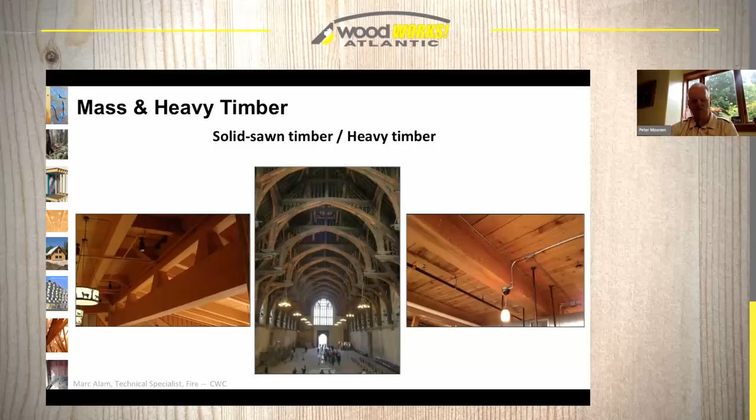So sometimes we think, gee, building tall with wood is a new thing - it's not so much a new thing, it's that we've forgotten that we did know how to do it. We're just getting back to that. It's a bit of a renaissance for wood.

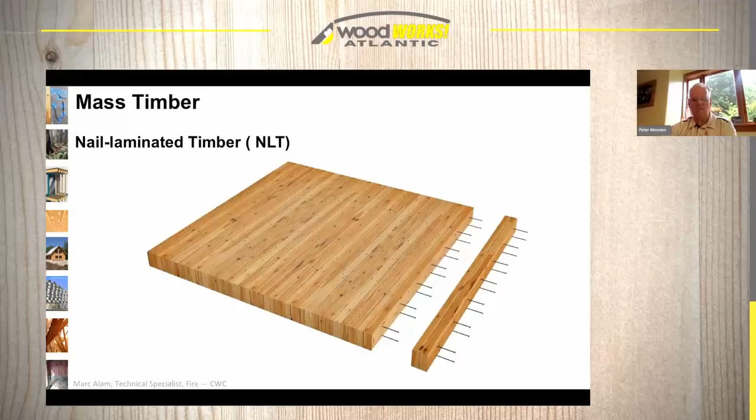The product I mentioned, nail-laminated timber, is mechanically fastened. It's long been used since we developed nails to make larger slabs of wood - fairly simple process, can be done on site, but increasingly is done in panels that are then shipped to site. Glue-laminated timber has been around for 80 to 90 years, and essentially uses smaller pieces of lumber that can come from smaller trees and are laminated together with a structural resin that can displace heavy timber and makes better use of the forest resource, either because it can use smaller trees or because it uses less wood overall compared to solid wood.

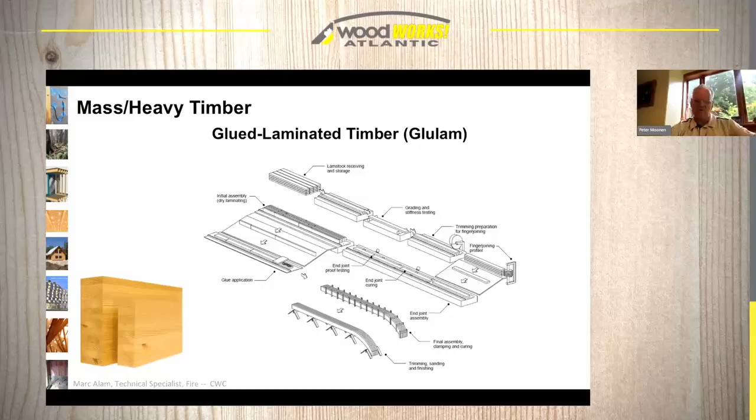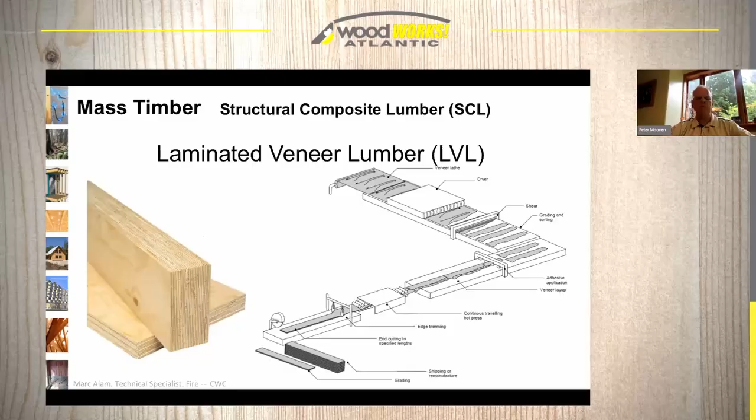Laminated veneer lumber uses veneer very similar to that used in plywood, but the veneer is all oriented in a single direction. So LVL, you've probably used it in headers along with LSL and some other engineered wood products if you're using light frame construction. But it is also a mass timber product - it can be glued together, and some companies will make it thicker.

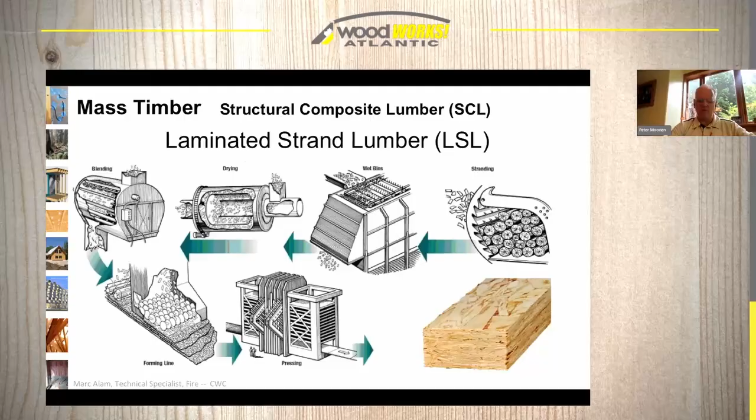Laminated strand lumber, oriented strand lumber - these are also composites made of smaller pieces of wood and resin, formed by pressure or extrusion, either by plates or by continuous process. They create a product like all mass timber products that's consistent in performance and cost, so the first lineal foot of a product like LSL is the same price as the last lineal foot.

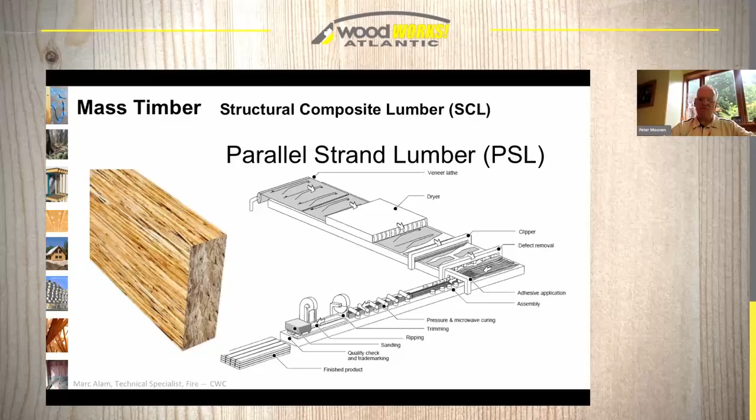Parallel strand lumber is probably the strongest engineered wood product. It uses long strips coated with PRF resin, put under pressure, extruded through high temperature, and produced in 64-foot lengths, which can then be resawn. They can be glued together. They're excellent as columns or posts. It's more expensive, but about 3 to 6 times the strength of a conventional solid wood product.

So these are all mass timber. CLT is sort of the poster child for mass timber. It uses traditional dimension lumber and is glued in cross laminations. It's been around for about 35 years in Europe, and about 13 years in Canada. It has the opportunity to displace other solid panel products, whether precast or tilt-up concrete panels, because it has a lower embodied impact, and we'll get into that.

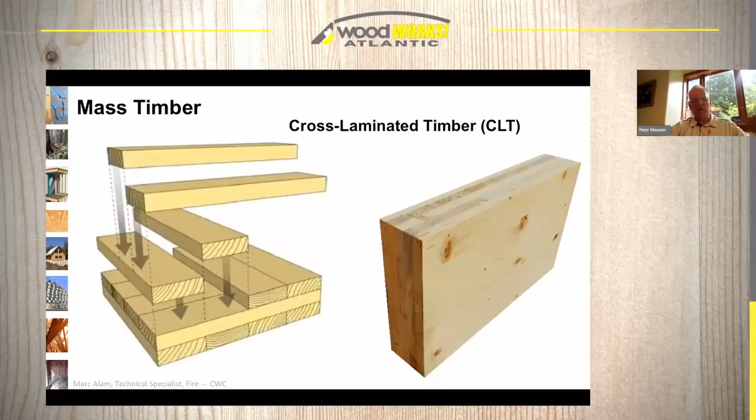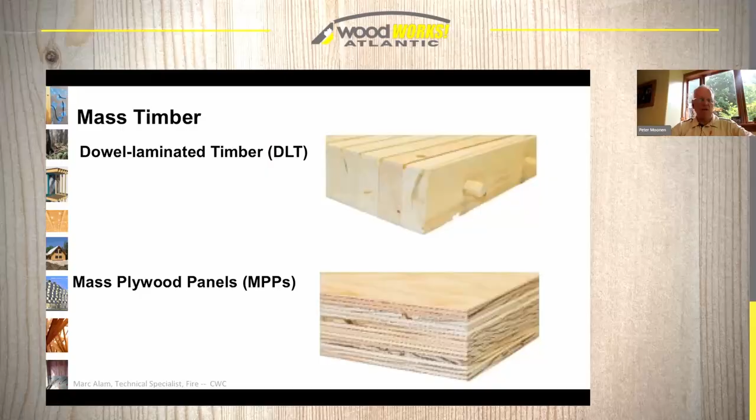Others that are out there now: dowel laminated timber, very similar to mechanical fastening with nails, but it enables a CNC to cut an opening for a door or window without encountering nails. And then mass plywood panels, MPPs, are only produced in one plant in the United States, but it's an exceptionally strong and versatile mass timber product.

There are mass timber products or plants all around Canada. We're constantly shifting, changing, and growing. Companies are either establishing themselves as new companies or expanding their facilities to meet growing demand. None in the Maritimes at this point, but I think we'd like to see that change, and I know there are some efforts going forward to make that happen.

One of the things that is increasing is full integration. It's possible to fully integrate our value process for wood products, and I think the industry is looking at mass timber, wood fiber insulation, and the future uses of these products. So we look at mid-rise construction or tall wood - that's going to require a different product than a high-performance single-family home.

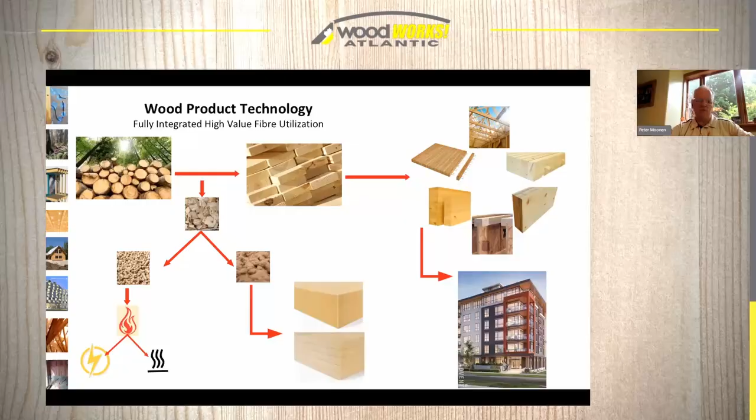The products that can come from a log include solid and also fibrous components. The fibrous components that can't be used in a structural or long-lived product can be used as an energy source to displace fossil fuels, and that is increasing, as well as looking at wood chips or wood products that maybe we don't want to put into paper or newsprint, which is relatively short-lived. We can make them into products like OSB, LSL, or wood fiber insulation, which is quite common in Europe, and all the facilities are increasing their production.

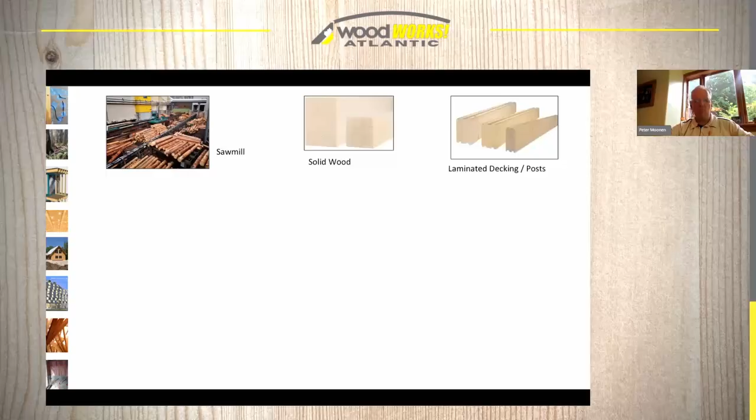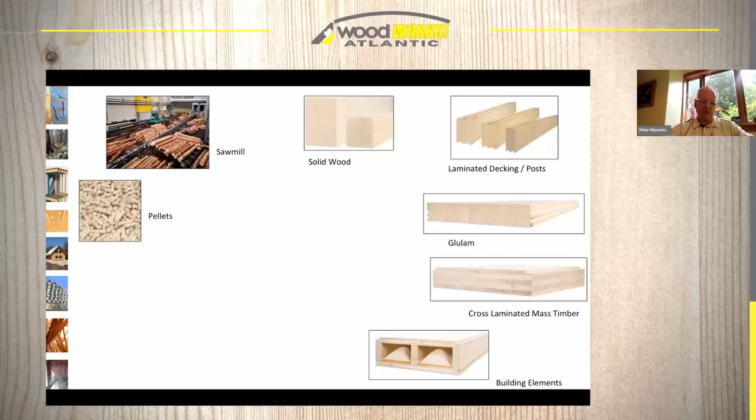So I want to talk briefly about one facility. It starts as a sawmill. It makes solid wood, laminated decking and posts, glulam, cross-laminated timber boxes, or torsion box products out of wood. It also makes pellets and energy - electricity, steam, heat, hot water, refined fiber, and wood fiber insulation.

And it's all in this one plant in a small town in Germany - you can see the town in the background. That plant was a sawmill for 100 years, and then they started growing and diversifying, and now they make all these products in that one facility. This blue-roofed building was the original farmhouse from 100 years ago that they've modified. So the potential for really utilizing our forest resource is amazing.

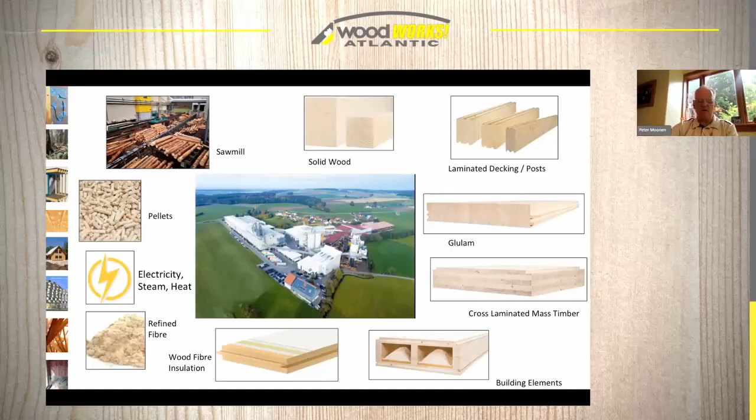Some of the opportunities I'll take you through are the regulations that are changing. We'll look a bit about construction capacity, changes in technology advancing both in design and wood, and some of the social issues we face, whether it's affordable housing or wanting buildings to be good for us. We'll take a look at some of the things wood can contribute to, like designing for deconstruction in the circular economy.

So first, let's talk about carbon. To deal with wood, you have to start in the forest. We've often said the benefits of wood are that they sink carbon in the forest, sequester it in buildings, and it can be substituted for other materials - that's the 3S concept. But it really starts with sustainable forestry, and sustainable forestry in Canada is something we have done very well. It's not perfect.

Anything that's done by humans, we're going to screw up. But for the most part, the certification levels that we have in Canada are as great as the next 10 countries combined. This was a certification globally around at the end of the year. Many of the areas in Canada are double certified - those have been removed from this - but we can be justifiably proud that we have a very high level of forest management, even if it's not perfect, and it will never be perfect, but we constantly improve.

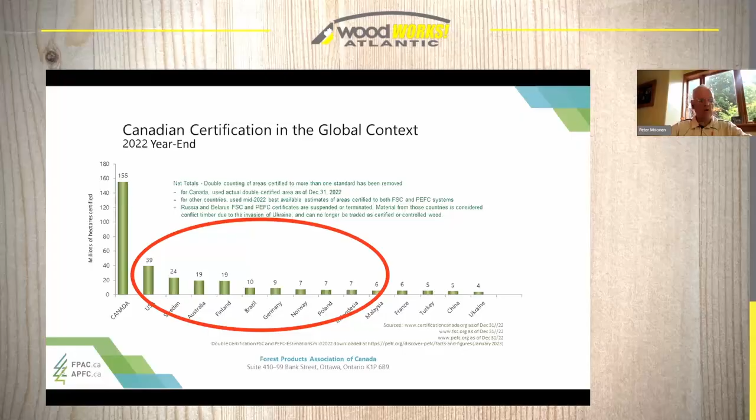The other thing about forests that we have to look at, especially these days - I know in the Maritimes there's been forest fires, I live in British Columbia, we have forest fires here. That is a release of carbon, and it comes from, it's basically an artifact of climate change, but we have to look at the forest carbon in the context of what the forest does for us.

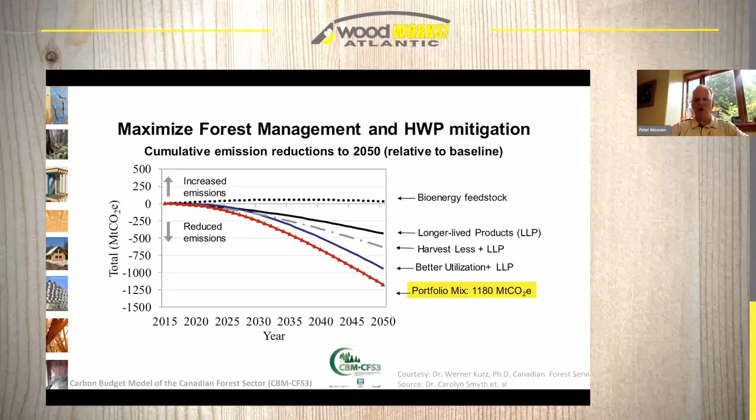The forest stores carbon, it produces wildlife or has habitat for wildlife, stores water, and produces wood products. You may encounter that there's several sort of 'let's just stop logging' or 'let's convert all the forests into buildings.' The carbon budget model developed by the National Research Council and Natural Resources Canada has been looking at the way to optimize carbon uptake and carbon benefits. They looked at bioenergy, harvested wood products and long-lived wood products, harvest reduction and conservation, optimization of the forest resource. And they found that if we're looking at carbon, we need to do a little bit of everything and do it really well. There's not a single solution - turn it into buildings or leave it all standing. None of those will optimize the carbon benefits that our forests offer.

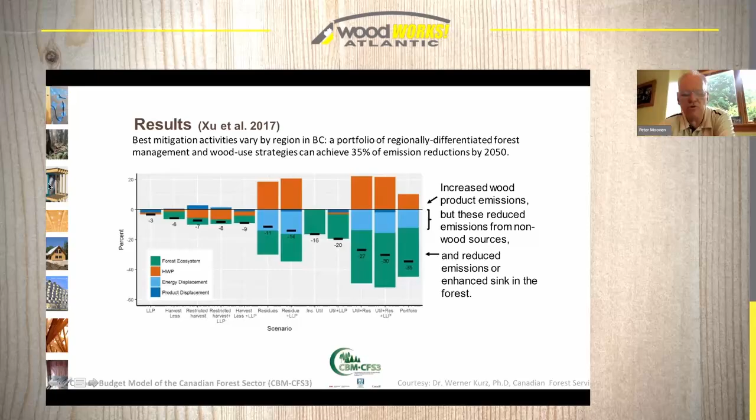The carbon budget model is available online, you can go take a look at it. As you can see, it's a parametric tool that looks at all the different elements that go into determining the carbon benefit of wood, from energy displacement to conservation.

There's also operational impacts, and that's basically high performance in green building. The federal government has indicated that they are going to be adopting a pan-Canadian framework that leads to zero energy, and will have a requirement in the 2025 building code to look at the carbon emissions associated with energy. In 2030, the building code cycle will bring in the carbon emissions associated with the embodied energy into wood products and other construction products.

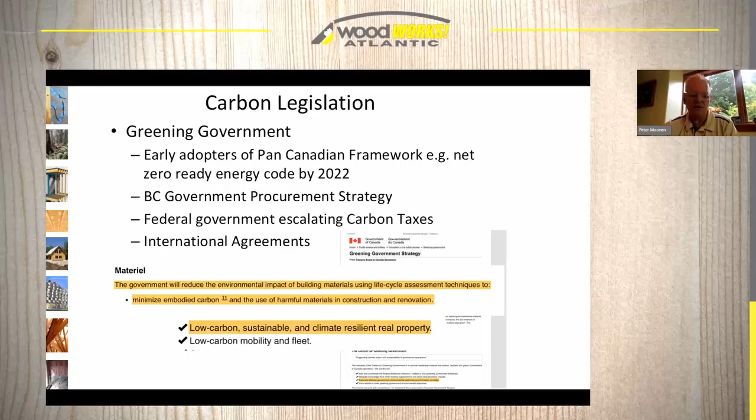So the government is moving quickly to recognize the carbon impacts of construction and their own procurement, and we're seeing that in local governments and provincial governments as well. It's not just reducing the energy use, it's reducing the environmental impact of building materials, and they'll be using life cycle analysis. Normally I'd ask people, who in the room has done an LCA.

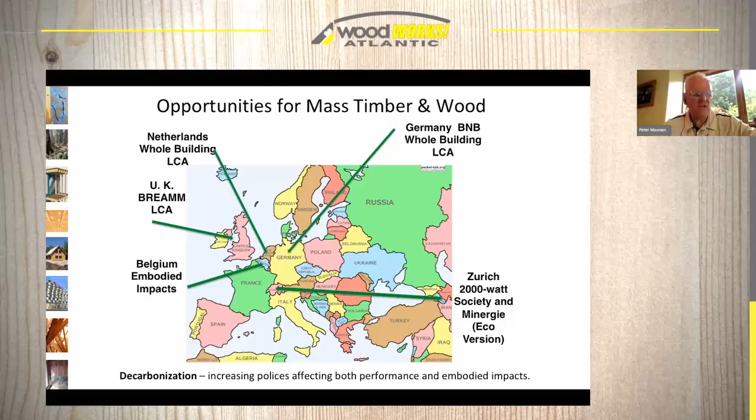I can't really see that, but it's not just in Canada that we're trying to advance the life cycle impact assessment. We're seeing it in Europe. In Switzerland, they were the first to have a plebiscite to look at a maximum energy use for people. Germany has whole building LCA requirements. Belgium went from having one of the lowest performance indicators to having one of the highest by requiring passive house construction. So the decarbonization effort is not just happening in Canada, it's happening around the world and often led by Europe.

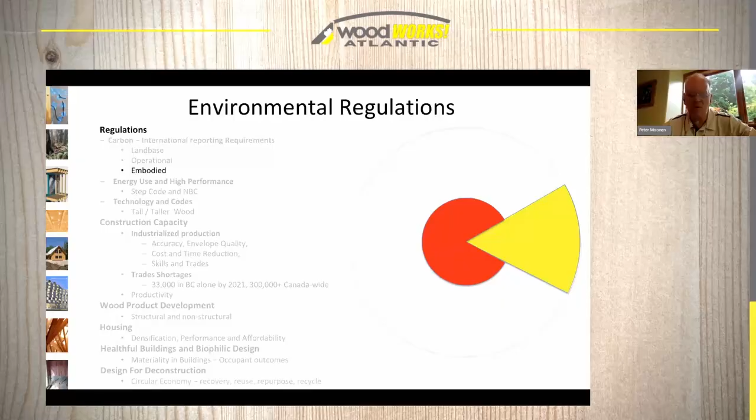I talked about embodied impact. That impact is essentially what goes into making these products. So we'll talk a little bit about that. Earlier, I mentioned the different aspects of wood and how it can have a carbon benefit or a carbon emission.

If one focuses on just the forest cycle, there are three areas. This was research done at the University of Washington, and it looked at the growth of a forest. This was a model based on the annual life cycle or potential life cycle of a tree. As a forest grows, it increases its carbon, and then when it's harvested, it loses that carbon from the forest, and some of it remains in the forest in soil, some of it decays over time, and some of it is in solid wood.

But over time, a forest will reach a stasis. We're finding this in the boreal forest, we're finding this in some forests in British Columbia. They store a lot of carbon, but they're not storing any more. They've reached a point where they are stable, but they're not increasing their carbon.

So the forest will eventually reach a stasis. If there is harvesting of a portion of that forest, then you can have both the carbon sink, but you can also have sequestered carbon. That's the carbon stored in products, whether it's furniture, books, or buildings. These buildings will last various lengths of time, so the slope of carbon uptake is less than that for the forest. But a real important consideration is that if you don't use other materials, you're avoiding the emissions associated with those.

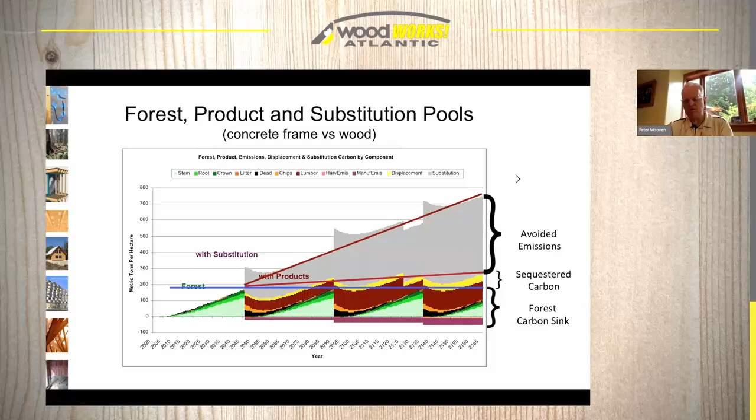So life cycle analysis is increasingly important. It's increasingly common. It's not easy to use. Some of the LCA tools are complex. There are several different tools out there, each with different assumptions and different ways they treat a material at the end of life, or in utilization, or in life cycle, or in lifespan.

So you think about that. We regulate the performance of a building, the building envelope, its structural integrity, seismic and fire resistance, and all that. But the parts of the building associated with carbon that are regulated account for just a quarter of the total carbon. We don't regulate how long a shower people have, or how much they cook, or what kind of equipment they use.

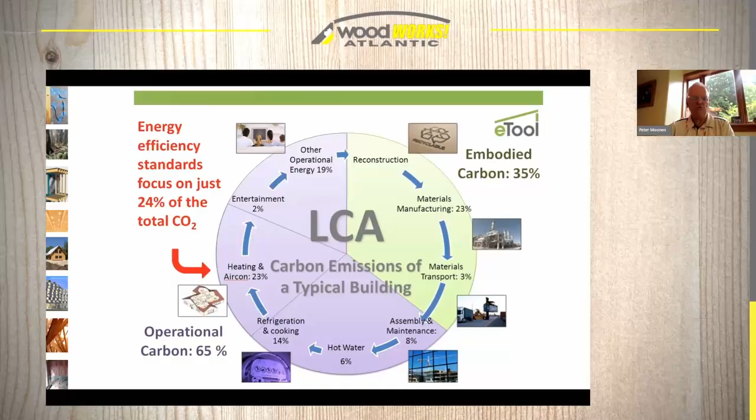But this points out that embodied carbon is an important component for us to look at. And we can't just focus on the energy performance. We have to look at the whole life of the building.

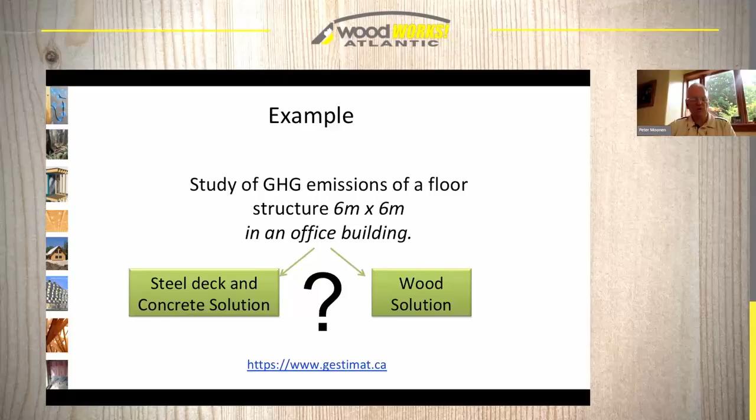There's a tool that was developed for the Quebec government a few years ago. It's called Gestimat. In Ontario, it's GHGMAT. It looks at actual building systems used in Quebec and now Ontario, determining what are the typical construction systems. They took those systems and determined what the environmental impact is of all of the components.

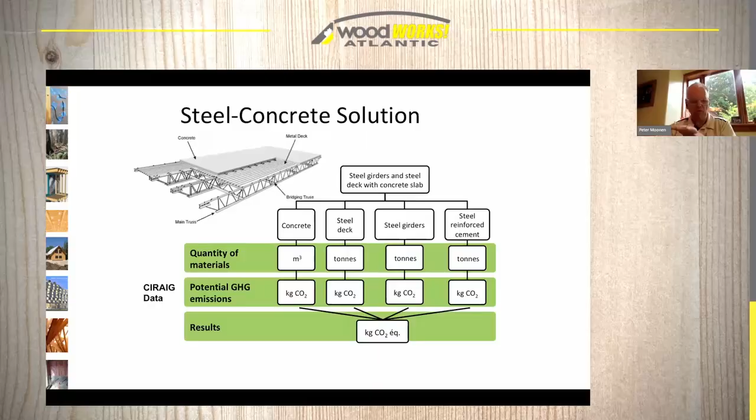So for a steel concrete solution, you're going to have an open web steel truss, for example. This is one of many systems. You'll have decking, rebar, and concrete. Each of those has a quantity or a mass, and that collectively produces the environmental impact. If we look at wood, it also has environmental impact. You've got to have the wood, the nails, truss plates, OSB or plywood. So all of these different systems have an environmental impact.

The use of LCA and tools like Gestimat or GHGMAT or other LCA tools help guide us into the approaches we may take. As mass timber comes into play, it's able to be incorporated in more building systems, whether it's a floor plate, a wall system, a structural interior wall, or a glulam beam or a column. So it's going to be important for us to understand not just the impact of a specific material, but the impact of that material in use with other materials.

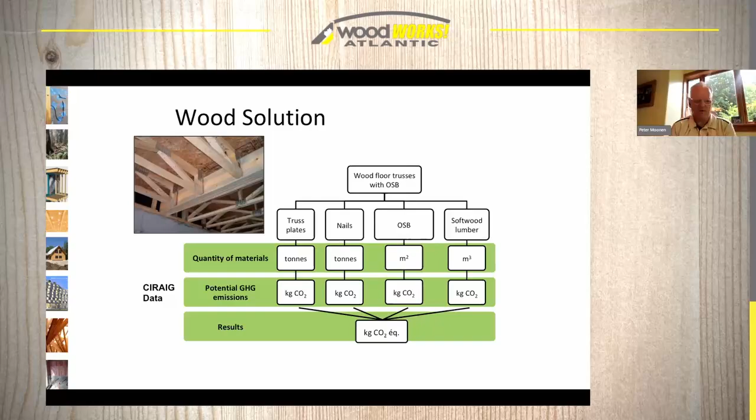I'll get into that a little bit later. But in the long term, the IPCC recommends that we've got to have a sustainable forest management strategy. We want to increase the forest carbon stocks, either by growing more forest land where there used to be forests but aren't, or by incorporating sustainable wood products into long-lived products. That will be the largest sustained mitigation benefit. It's not just a reduction, it's actually a mitigation—by removing the CO2, it can actually store that from the environment.

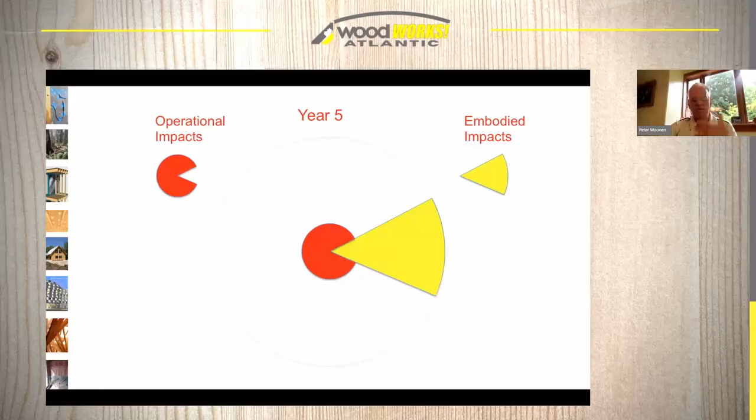Over time, as you operate the building, you add impact. Year 1, year 5, year 10. In this particular model, at year 12, with 15% and an 80-year life cycle, the embodied equals the operational energy. After that, the operational energy dominates.

However, there are things that may not always be reliable. Is the building well maintained? Was it well operated? Did the owner get tired of it? Did the land value come up where you say, you're telling me it's worth how much? I'm out of here. And a perfectly good building can be torn down. We see that happening, especially where I live near Vancouver. A perfectly usable building gets torn down because the land has more value for something else.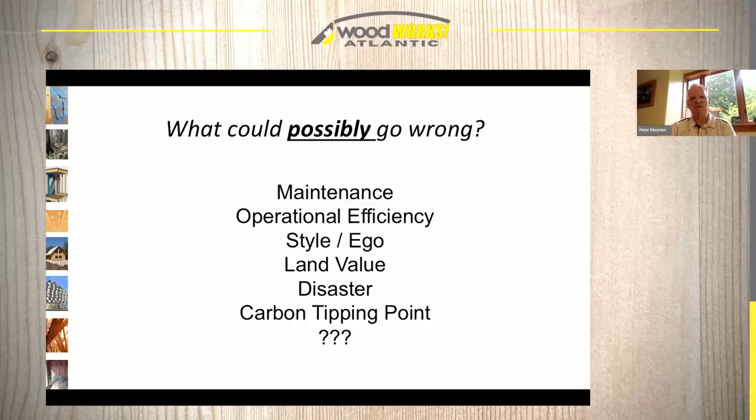So these are all variables that could extend or reduce the life cycle of a building, and the future is very difficult to determine. So we do need to pay attention to the embodied impact.

One of the things about wood is that it's classified as a biogenic material. So we know that over time, that wood is likely to go back into the atmosphere. Very few buildings are going to last 1,300 years, like a couple of buildings I know of in Japan and in China.

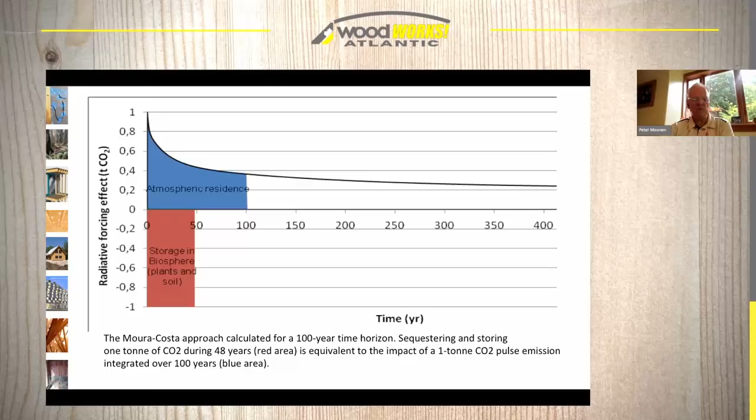But even the delayed emission, which is how biogenic carbon is treated, has a benefit over time. So we have to recognize that maybe the benefit now by sequestering and storing carbon will give us time, or extend things, before the tipping point, until we have reached some other solutions.

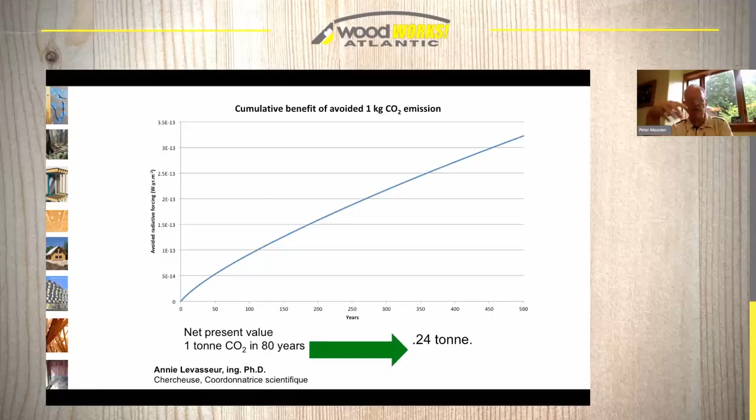With respect to wood, this is some work done by Dr. Annie Levasseur, who calculated that the net present value of a ton of wood now is equivalent to 4 tons in 80 years. Just like a pension or investment plan, put $1 in now, you hope it's worth a few dollars in 80 years. That's the carbon benefit, and that's the benefit of a delayed emission.

So let's talk a little bit about energy use. This is a mass timber building built in North Vancouver. This is the artist's sketch at the beginning. It's 3 stories, not a complex building. It's an infill building, 24 feet wide, mass timber, glulam, and light frame passive house panels. No basement, no underground parking.

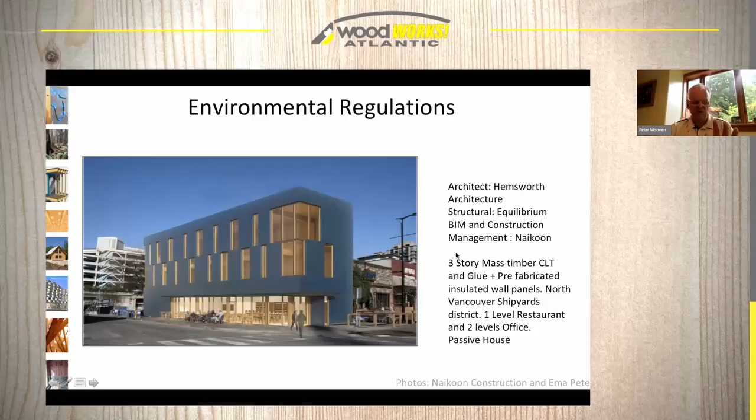The owners chose to use this wood because they wanted the building to be resilient in an earthquake. They wanted it to be high performance. They wanted it to be comfortable, and they wanted it to look nice. This is the completed building.

This kind of building is probably very repeatable in most cities around North America. It's an infill because it's zero clearance on the back wall. It's 3 stories. The structure took 10 days to erect. I was on site most of those days taking photos. It was a very impressive and fast little building.

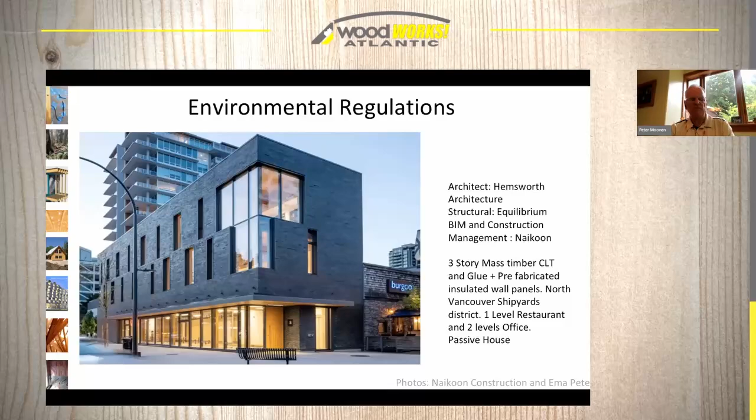So those of you in the construction sector who've ever built a mass timber building probably get the opportunities from speed. But again, this is the direction of our codes around environmental regulations, and that's an opportunity for wood products, partly because wood has thermal performance values, but also because it has a low impact.

So what we did is we took that same model we used before and applied a passive house level of energy use to that building. Passive house buildings or high performance buildings typically have a slightly higher embodied impact, as shown here. It's about 12% more materials used, typically in the envelope. So we had to account for that.

Then we started looking at the operational additions to that. With a passive house building, the incremental annual operations are much smaller. So at year 5, year 30, year 80, we still had not reached equality between embodied and operational, such that the embodied impacts after 80 years for this model were 54% of the total life cycle carbon emissions associated with that building, which is about a third of the overall impact of a conventional performing building.

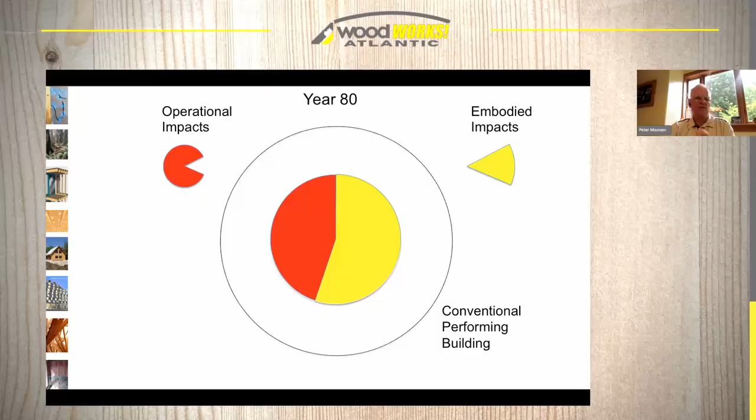So operational performance and embodied impact from materials, they both need to be considered, and they need to be considered at the same time. What we're talking about today are some of the changes.

We're doing this across the country.

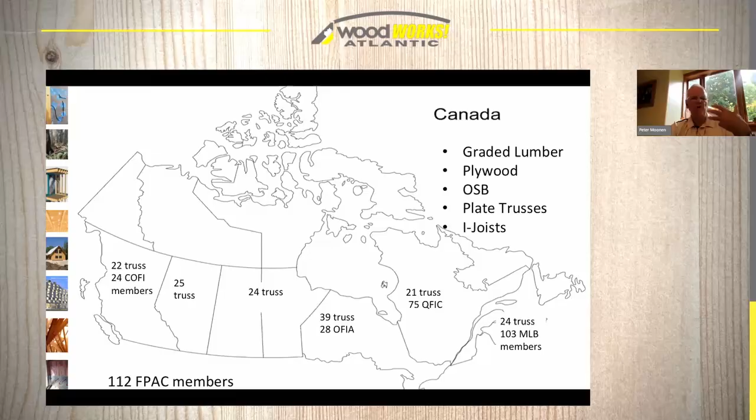I took a slide and didn't realize there was a video on that, but we're doing a life cycle survey of these 5 products around the country. We've got truss companies, lumber companies, plywood companies, OSB, you name it. And we're gathering the life cycle information so that we can contribute to the life cycle inventory of the database that is being developed by the National Research Council.

So for those of you who may not be familiar, there are several stages in life cycle analysis, starting with where a product enters the system.

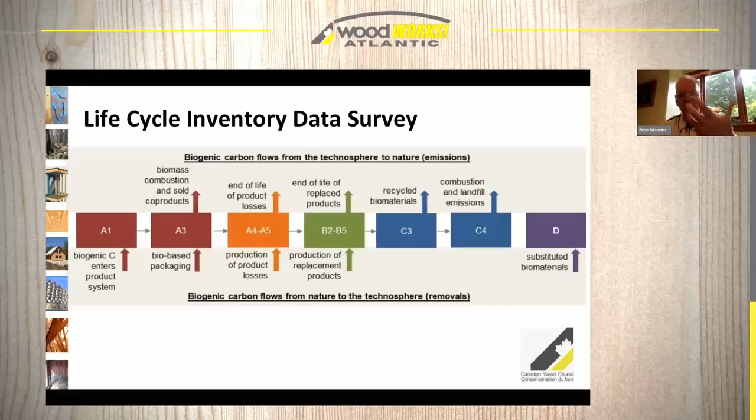All materials have to be extracted. So what are the impacts of extraction? Whether you're mining, logging, or harvesting on a field, they all have an environmental impact in their system. As you go through, you have to manufacture it. There's also replacement products, transportation impacts, and at the end there's combustion, landfill emissions, end of life, recycling - all of those things.

So for the work that we're doing, we needed to look at the extraction of raw materials, the wood products, the transport to the factory, and the manufacturing of the products. At the end of the manufacturing, it moves into the next boundary - transportation to site and then construction use.

The life cycle inventory we're doing for wood products will be available and uploaded to the database in 2024, and it will be available for designers to access. It's run by the federal government - they're using it for their own procurement, but it's going to be available to designers because they design federal buildings. This kind of information will enable designers and procurers to say, what's the carbon impact of my building?

The Wood Council often gets involved in helping people design, but we don't get involved in actually constructing the building or using and maintaining it. But that's another area where choices made there will impact the embodied emissions because of choice of material. As I mentioned, there's no perfect material, and I think we're going to be looking increasingly at hybrid design.

Wood, steel, concrete, glass, aluminum - every building is already hybrid. But there are structural systems that can really reduce the impact, and that's where heavy and mass timber can play a role.

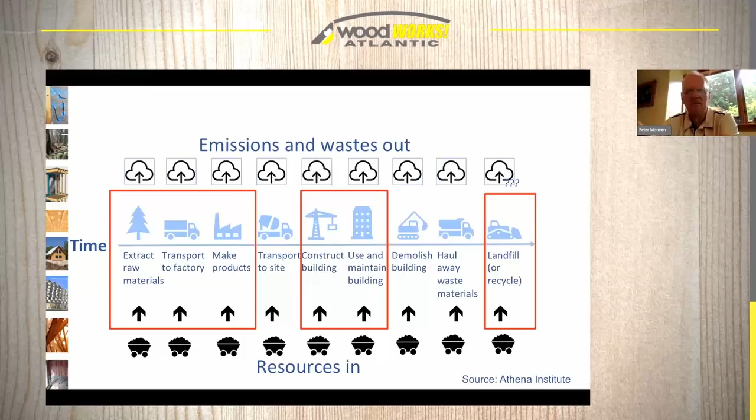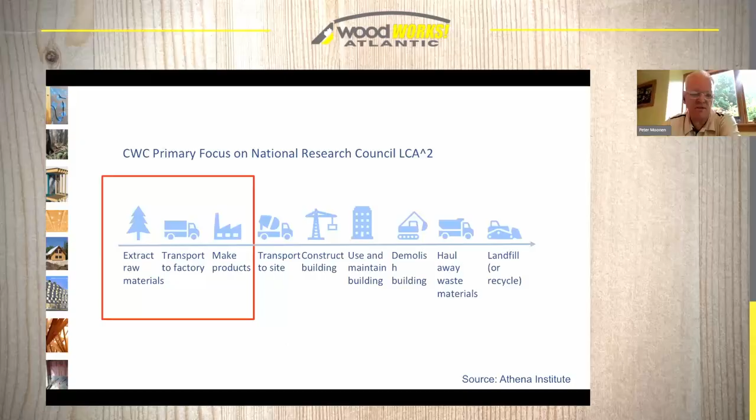So this is some work that we're focusing on with the National Research Council in their LCA squared - that's low carbon assets through life cycle assessment process. And we're focusing on the A1 to A3 product stages.

So, technology and codes. The Wood Council gets involved in codes. We don't get so much involved in developing technology, but that is changing as it is for wood. The codes are allowing taller wood buildings, and the codes are requiring higher performance. In the case of taller wood buildings, it's usually an issue around fire.

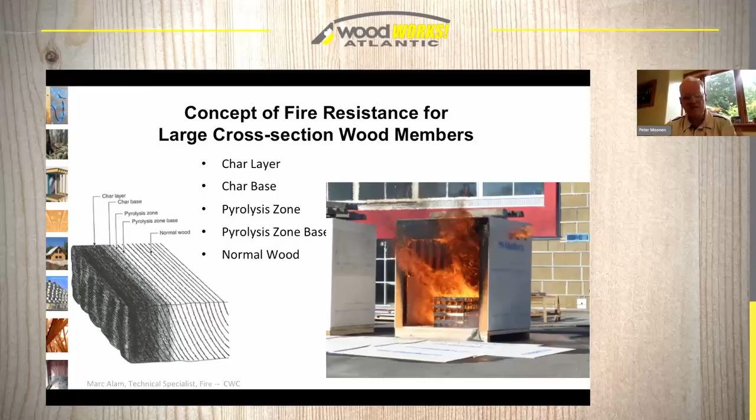Here, after an hour and 15 minutes, you can see we had about three-quarters of an inch of loss in the ceiling of that DLT mass timber roof. Here you can also see the same - this was a glulam beam that was inside the burning structure. After an hour and 15 minutes, the side exposed to the flame had lost about three-quarters of an inch, and the side exposed to a flame going past it was about half an inch.

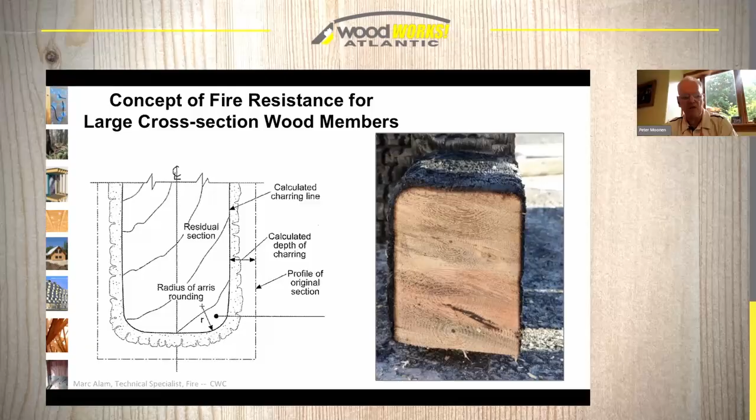So this understanding of wood and fire has enabled code officials to say, okay, if you have this much wood, we know that it will be safe for the occupants so they have time to get out, and for the firefighters who might go in.

Another thing that is becoming important - and if some of you are in the construction sector, I see Rick Burr was on the participants. Hi, Rick. As a contractor, I think looking at prefabrication and construction capacity and industrialized production is something very much front and center.

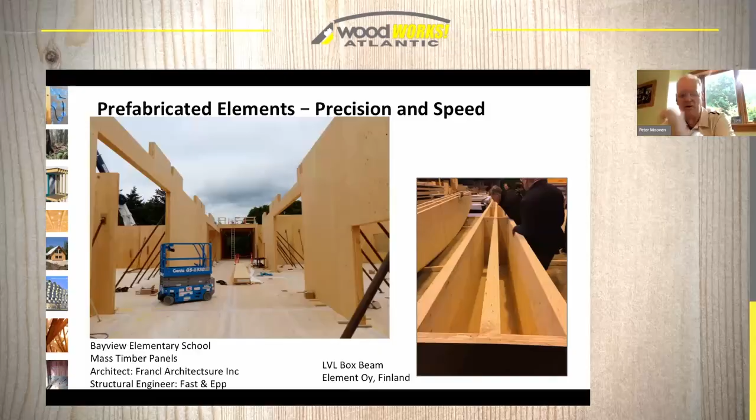Wood elements, especially heavier mass timber, are generally prefabricated. They don't show up and have guys with chainsaws manipulating them on site. The picture on the left was an elementary school built in Vancouver by the Vancouver School Board, all prefabricated elements just dropped into place and connected. On the right is a box beam created by a company in Finland, again prefabricated and just installed.

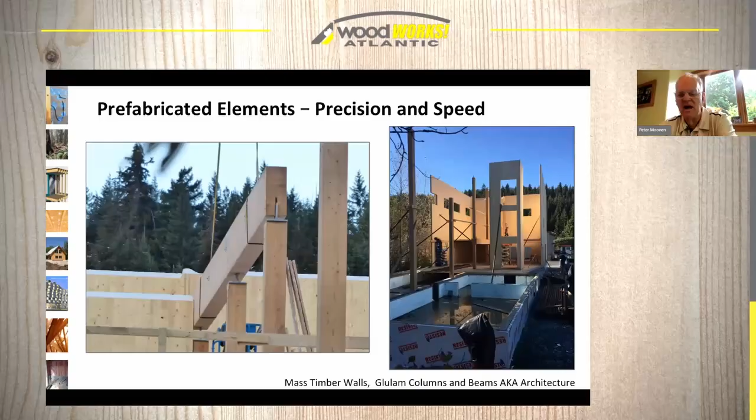But it still proceeded and went up in 7 days.

The other thing that the construction sector is facing is labor shortages. In BC, we have tens of thousands of jobs in the trade sector: electricians, plumbers, framers, foundation people, envelope people that are in short supply. I know it's the same in the Maritimes, in most of Western Europe and in North America.

That means that we have to increase productivity. And productivity is different from production. Productivity is the amount of work accomplished by every individual worker. That's a big issue. The construction sector has had fairly low productivity over the last few decades.

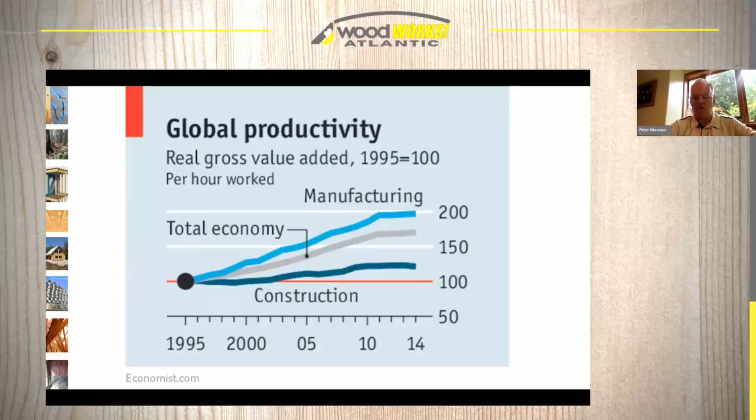In fact, when one looks at the productivity of the construction sector, it's one of the lowest. Since 1947 until 2010, the productivity growth rate for the construction sector was 0.1%. Who's going to make an investment into that?

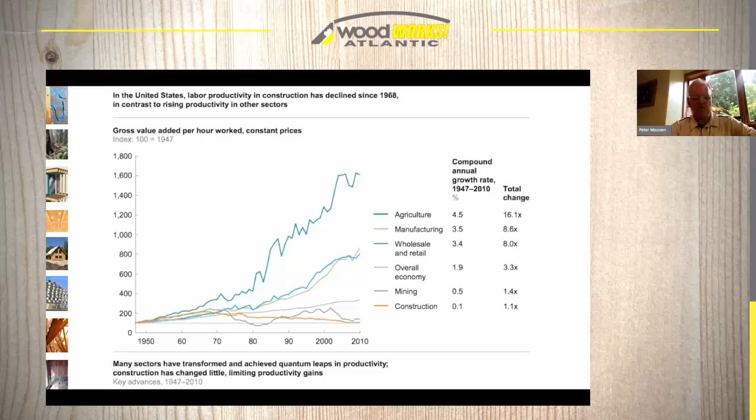Part of this, I think, is the complexity of the buildings and the expectations for our buildings. It takes longer to produce some of these buildings, higher performance expectations. All of this - these are reasons, but we can't use them as excuses. We have to look at solving them. And this is where heavy and mass timber can come into play.

Technology is also impacting wood product development through resins, the chemistry of resins, to make them either lower impact, more durable, or faster setting. And then there's the technology around the software used in designing buildings, whether it's fire modeling, seismic modeling, or direct to machine machining for wood products.

That's all enabling us to have better productivity, faster construction, and more accurate construction, which leads to tighter joints, lower air loss, and better energy performance. So all of these are interconnected.

This joint on the left took 4 minutes to produce, at a company I saw in Finland. Now I look at that joint, and it was quite impressive - I thought it would take me a week to do that. As a woodworker, I would take a week to do that. A traditional timber framer would never consider a joint like this because it's just too difficult to do. But the technology available now in machining wood, and the tolerances that wood delivers, are really valuable to contractors, provided you get the system right.

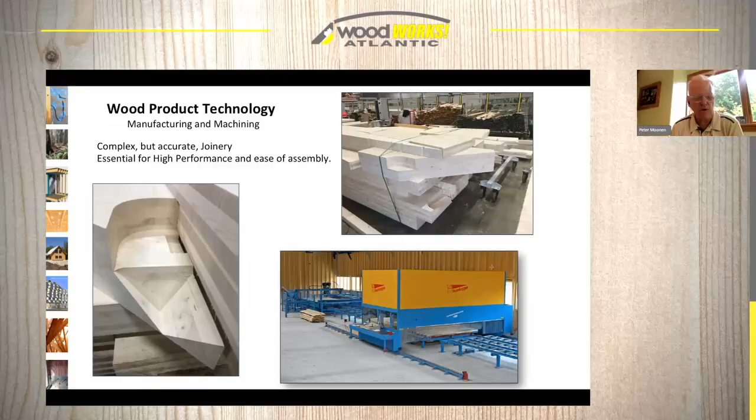And I talked about labor shortage - we need detailers, we need engineers, we need architects who understand the opportunities and the potential for wood and have the technology to deliver that right through to the manufacturing and the construction on site.

I'm not going to talk much about virtual construction and building information modeling - it's something I'm sure you're all more familiar with than I am. But this particular sequence of pictures was done for Brock Commons 7-8 years ago. They pre-built the building, and that helped them with their efficiencies, the order of operation, safety issues, emergency egress issues, crane use, all that kind of stuff.

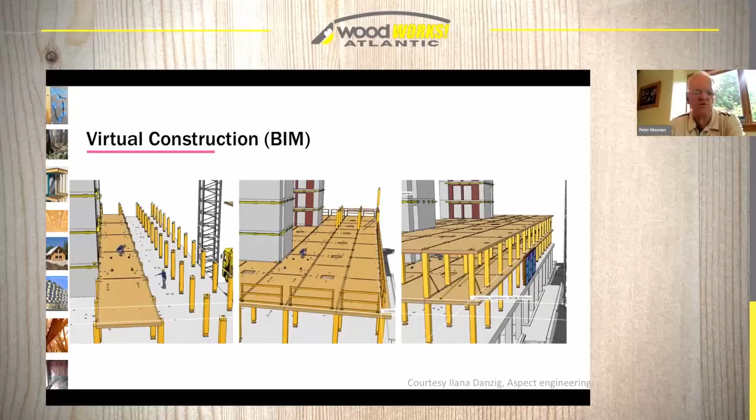Many wood buildings now, especially mass timber buildings, are using this technology because it gives them a heads up - oh, we better not do that at this point because we can't insert the next piece. I know of several buildings where the contractor, the trades, the installer, and the client are all working together to make sure that the approach for construction is accurate, fast, and safe.

So some of the social issues which are opportunities for wood. I think one of the biggest issues that we face - and you saw yesterday, the federal government even switched out their housing minister.

Densification is happening because land is less affordable, and people want to live in cities. A lot of cities can go up or they can go out. Cities like Vancouver have to go up because they're bounded on 3 sides by water and 1 side by another city. So that creates densification.

At the same time, building codes are requiring that these buildings have higher energy performance. We're also concerned about affordability. So the whole issue around housing is an opportunity for wood products.

It uses mass timber elevator shafts that can just be dropped into place. So the social issues that we are facing collectively have some solutions that can be found in wood.

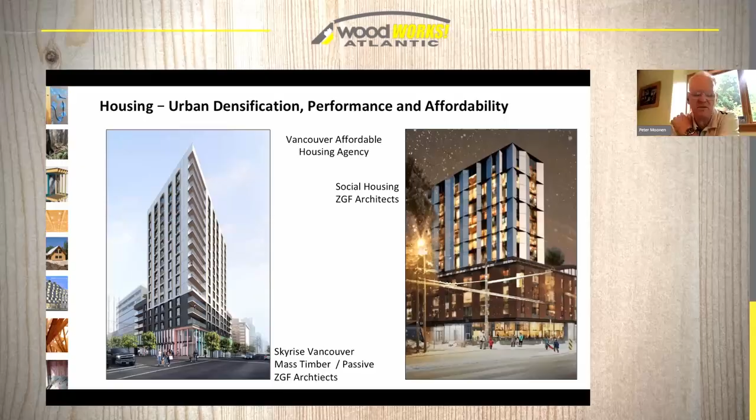Mass timber elevator shafts are found in virtually every mid-rise project in British Columbia and in Ontario. Ontario is moving that way too, but they stick to mostly concrete. In British Columbia, we have 950 buildings that use wooden elevator shafts. In Toronto, there's a couple of mass timber buildings that use mass timber elevator shafts, but the difference in speed of construction and ease of design with an all-wood building versus a mixed building has demonstrated itself in the mid-rise sector.

On the left, it's an NLT mass timber elevator shaft. On the right, it's CLT. The CLT one that we see here had 3 stories dropped into place, and it took about 15 minutes to drop a 3-story elevator shaft that was fabricated and assembled on site and dropped into place.

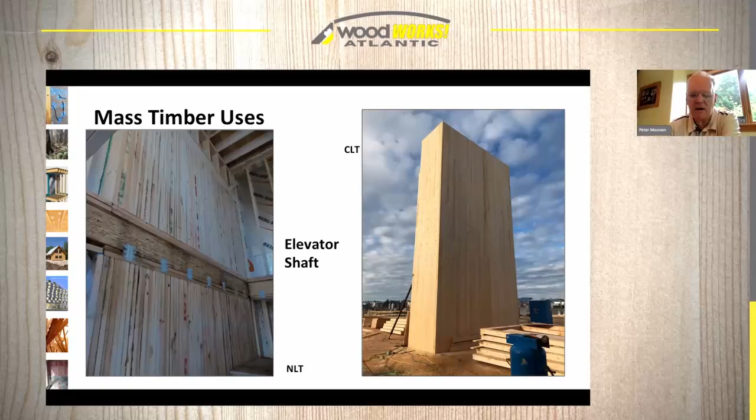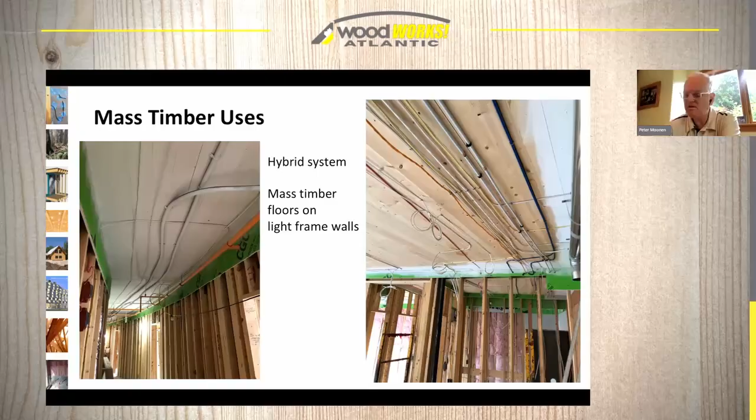Several of the new commercial buildings, office buildings, are also moving to having steel beams or steel columns. Even the Fast+Epp office, known for their wood engineering, uses a mass timber wall system with glulam beams and steel columns. Why? Because in this case it was cost, it was also space, it was also availability of material. So mixing and matching steel and wood can be a very efficient, very effective way to advance a building that deals with affordability as well as the speed of construction and the operability of the building and the floor space.

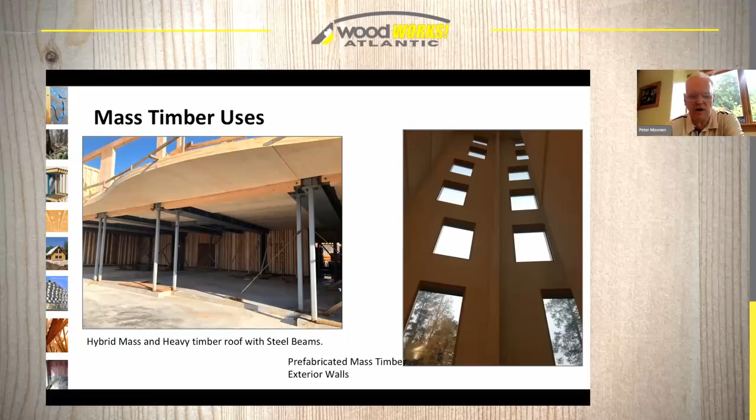The building on the right is a finished building. This is it on the right here. They had mostly all prefabricated elements, including these 2-story, 1-story, and 3-story balconies that were slipped into place on the finished exterior using a steel dovetail. They had to be prefabricated because the accuracy of those dovetails was essential to the structural integrity and the building envelope, because this was also a passive building.

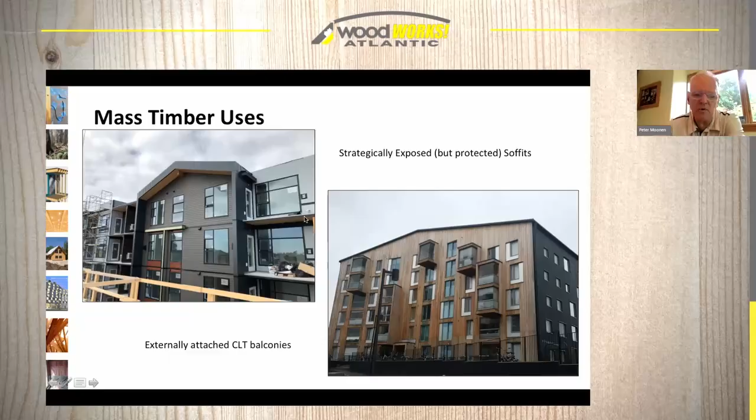CLT and mass timber products can be used outside, but you have to detail it properly. In this situation here, you've got attached CLT balconies that are protected by a cladding and a lip here that protects them from water ingress.

There's also non-structural use. Naikoon, the building company that built that 3-story passive house in North Vancouver, made stairs with no metal connectors. They used a new resin called TS3 that enables rapid construction. It's structural and it doesn't burn. I was completely amazed when I saw a test result that showed the only thing left after combustion was the resin.

There's an architect in Toronto, Tye Farrow, who has recently completed a master's of neuroscience in architecture. Who knew? He has long used wood for its healthful benefits in hospitals, care centers, and education centers. The reason he took the master's was to better understand the conscious and subconscious role that materials and our buildings play on us—whether it's a sound or buzzing we may block out, our body still has to process it. Air quality, particulates, temperature, moisture, natural light, and the materials we use all matter. Increasingly, there's research on the health benefits and reduction in stress levels, heart rate, and sweat with exposure to natural materials, be they stone, wood, plants, or natural light.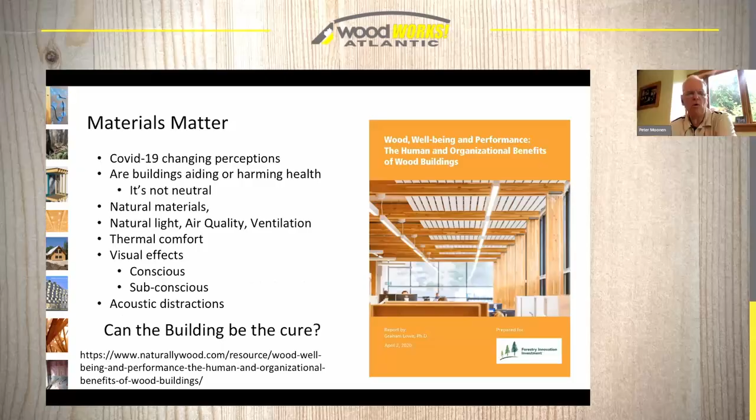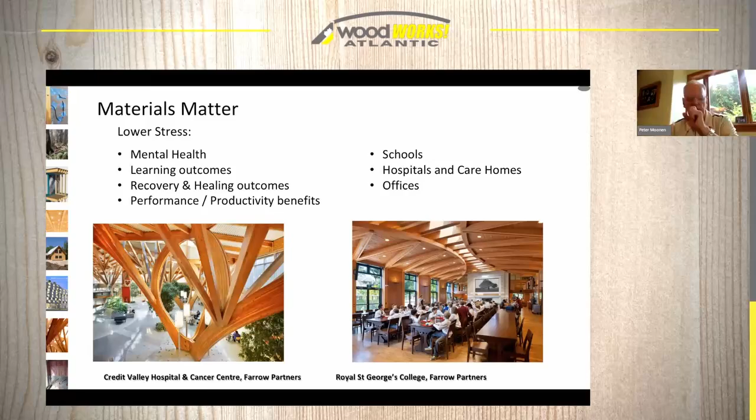If you really would like to explore this, there's a very good document on wood well-being and performance, available at the Naturally Wood website, and it's free. This is an area where we need to consider: are the buildings we're designing helpful or harmful? As I say, they've used this in several hospitals and colleges, and they've got an incredible website if you want to look at it. They understand the health benefits of wood as well as the increase in performance and productivity of a wood building.

Finally, nearing the last few slides: designing for deconstruction. I mentioned at the beginning that there's a role to be played by all in the value chain of construction, architects, engineers, and designing for deconstruction is critical to extend the life of the materials that go into our buildings. There are a couple of standards developed in Canada for deconstruction of buildings and design, but we're not there yet.

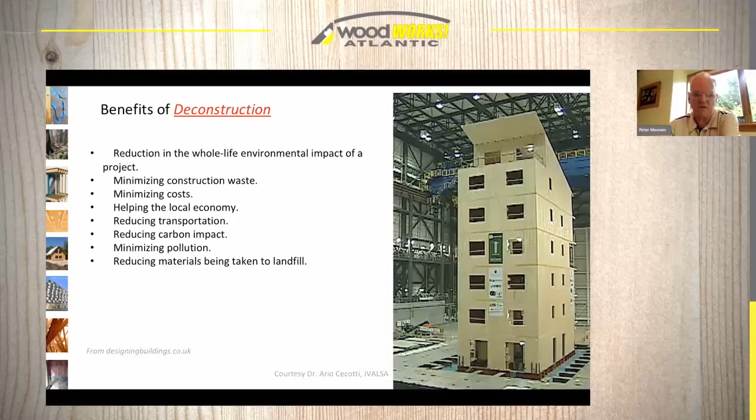Mass timber has an opportunity to increase the potential for deconstruction. Mass timber buildings are fastened by mechanical connectors. They're not poured, they're not welded. The mass timber itself is glued, but the mass timber buildings are not glued together. This is an excellent opportunity for design and reuse of buildings. This is a building that was built in Italy, deconstructed, sent to Japan, put on an earthquake table, subjected to several earthquake tests, then removed, taken back to Italy, built as a student residence, and then deconstructed and used as a kindergarten.

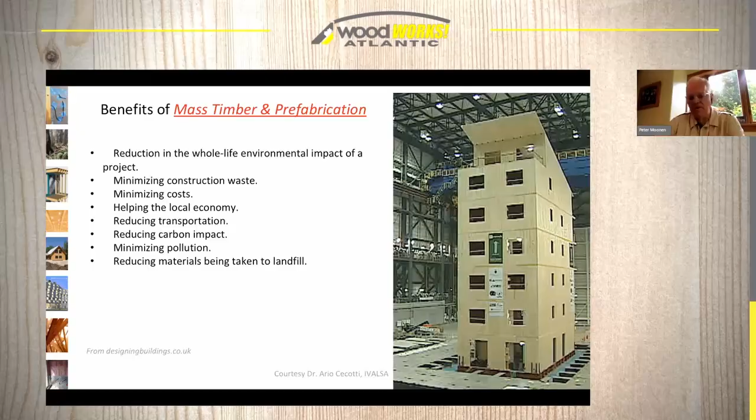So the benefits of deconstruction are very similar to the benefits we find with mass timber and prefabrication. If you're considering buildings that can be reused, take a look at some of the mass timber connection systems and products, whether it's modules - I know there are some prefabricated modular buildings in PEI. These kinds of buildings do have a chance to be taken apart.

A couple of years ago, I had the opportunity to be here. This is the top floor of that building as it was nearing structural completion. So it's a mix of steel and wood.

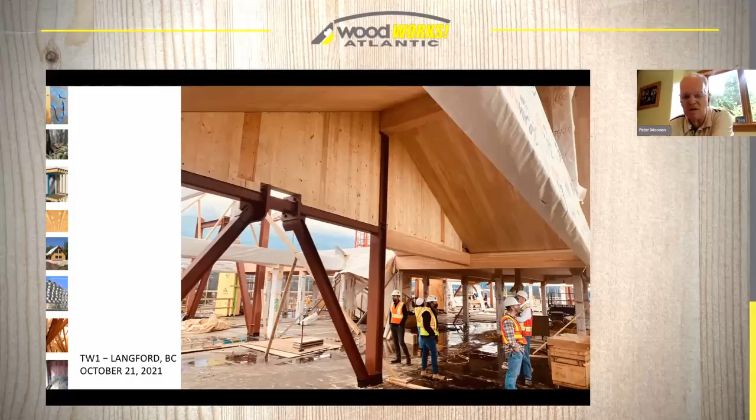There's a company in British Columbia called Intelligent City. They're using mass timber to make prefabricated high-performance wall systems for multifamily and affordable housing. These are elements we have to look at - how mass timber can contribute to what we need, not just using it because you like wood. That's fine, I'm a wood geek, but look at what the product can deliver for what you need.

Is it performance? Are you trying to have low carbon? Do you need speed of construction? Do you need accuracy? Are you focused on cost? There's a whole bunch of different systems out there: solid wood, hybrid construction, light frame. Take a look at those.

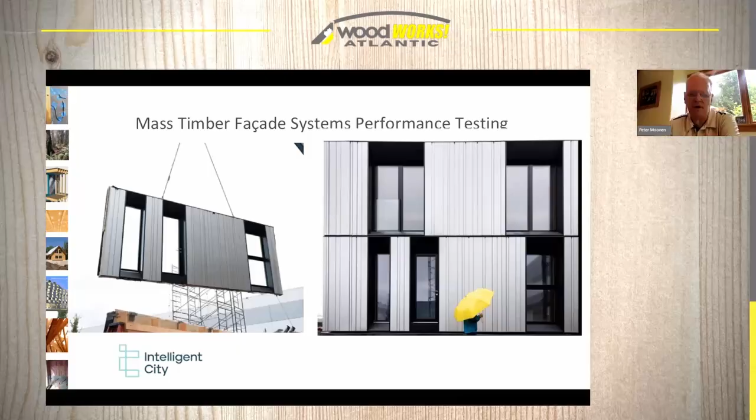One of the biggest fears we have is wood rots, it burns. Here's the building I mentioned earlier. It's 1,300 years old. Designed in an earthquake zone, a typhoon zone, with fog, wind, rain, high temperatures. It's an unconditioned space, but it was built without metal connectors.

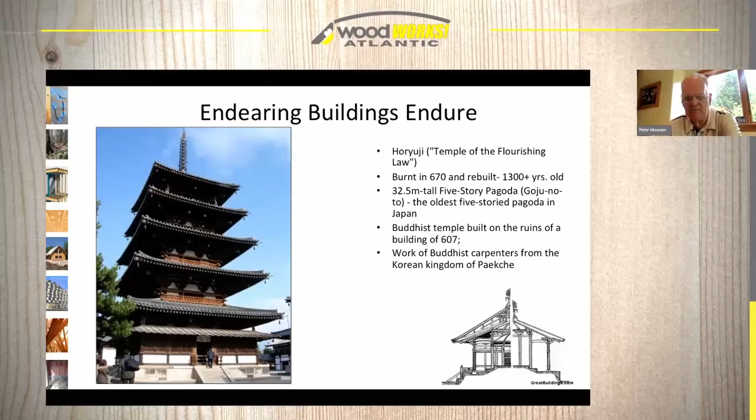One of the things I'd like you to consider is that materials will only do what we ask them to do. They don't fail us, but we may fail them. If we design a building, whether wood, steel, or concrete, and we don't understand what that building is going to face, it will fail. We have to understand how these materials work together, how they can be integrated, how they can perform to optimize what we need them to do. If we don't do that, we're really not doing our profession, our clients, and our environment the due diligence that we should.

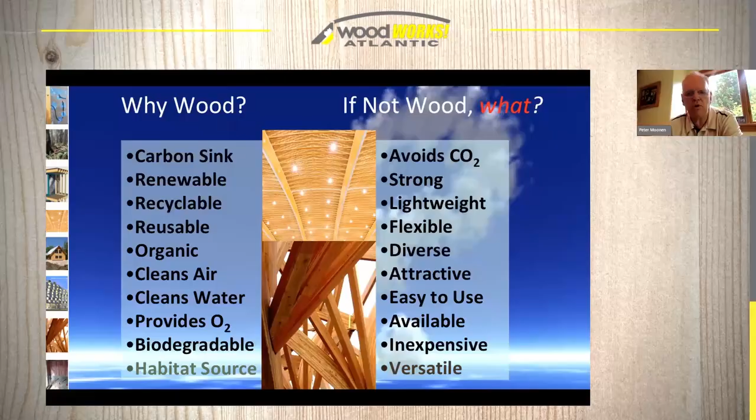I'm often asked, why would I build with wood? Well, it's all of these things. If there was a material that was a carbon sink, renewable, reusable, recyclable, biodegradable, that cleans the air, cleans the water, provides habitat, avoids CO2, is strong and lightweight - all of these things - I'd be rich. But we have trees. So the question maybe shouldn't be why wood, but if not wood, what? If we're going to build, what do we need to consider, and what choices do we have?